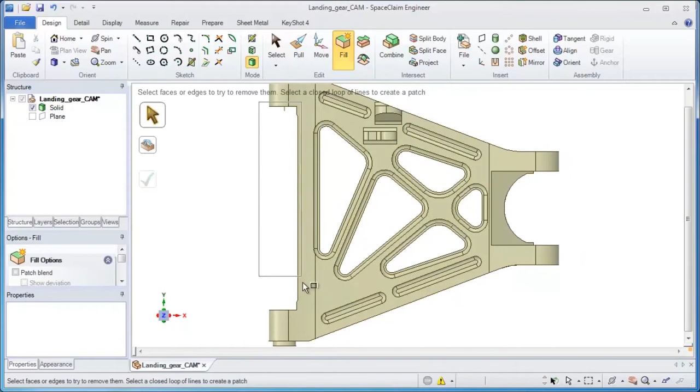Jig and fixture design is critical in almost every part that's machined or manufactured. And it's difficult because most of the time people are sent 3D models to work with and they need to prep them and get them ready to make their jigs and fixtures. But with SpaceClaim, changes can easily be made to downstream data, and this can come from IGES files, STEP, or really files from any of the major CAD systems that are out there.

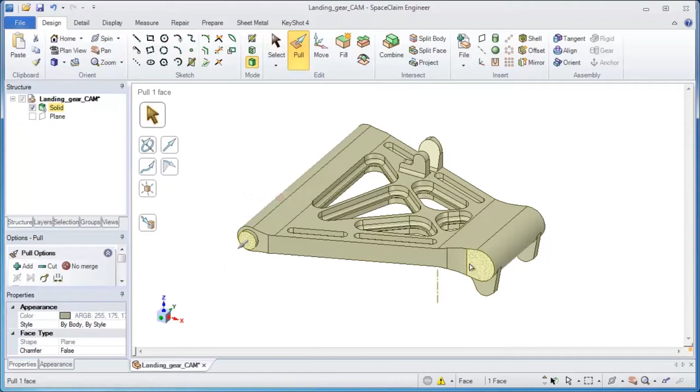You see, the fact is, most geometry needs to be tweaked, changed in some way before a fixture can be made. Pockets might have to be filled in, faces are modified, and stock needs to be added in certain areas. In SpaceClaim, when you're done editing the model, you can of course lock the model down, so no further changes are accidentally made to the design.

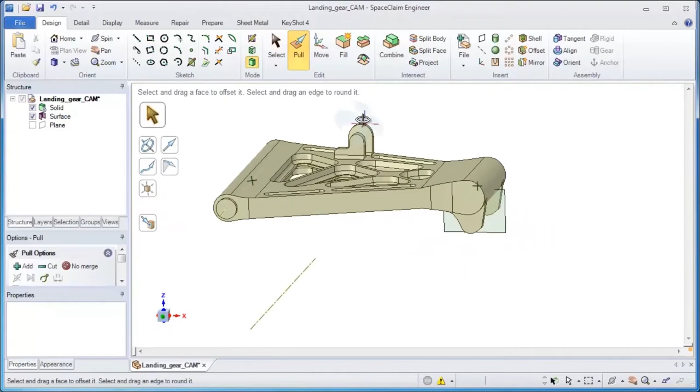SpaceClaim is a tool that can do two main things in this case. First, it's a tool that can modify any incoming geometry, treating it as if you made it from scratch in SpaceClaim. The second thing it does great is it makes models from scratch, so you can make your own geometry, maybe to make soft jaws or models to hold your parts as you're doing your fixture and jig creation.

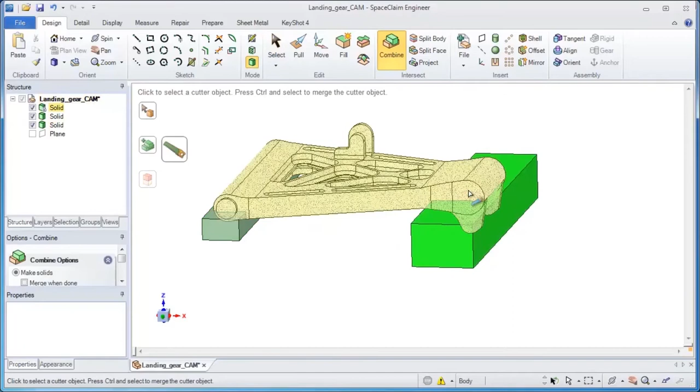So we've made two simple blocks, and it's as simple as subtracting the workpiece from them to get the inverse. Now we have the soft jaws just to hold the model, and the best part about this is that you're not tied to the model in any way. If you need to add bolt holes, if you need to change faces, even if you want to stretch these out and cut them away so it's easier to manufacture, you can do so. Or why not offset all of the faces so you can machine at the nominal tolerance?

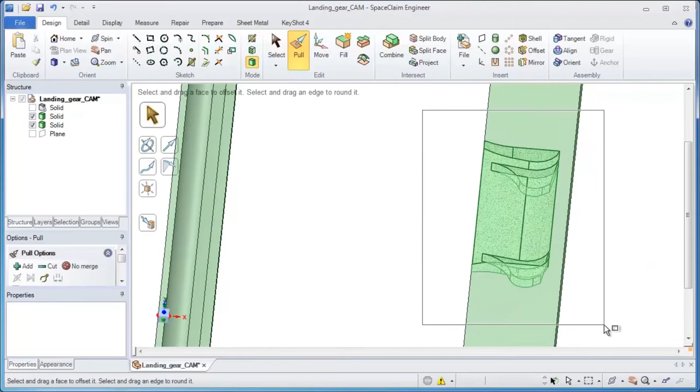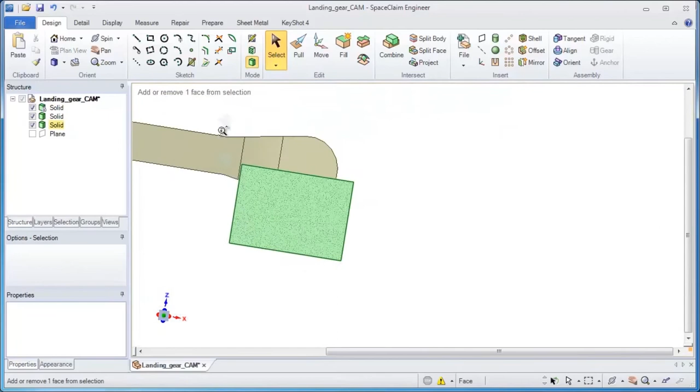Now with SpaceClaim, it's essentially one tool, Pull, that does so many of your operations. It offsets, it creates geometry, so you can really get in, get out, and focus on getting your job done. The thing people realize after using SpaceClaim is that they're not paid to mess with geometry and make changes to it. They're paid to get their job done. And this is what SpaceClaim wants more than anything else.

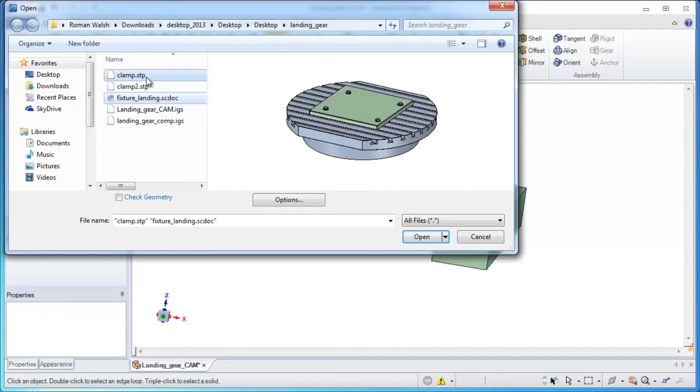We want you to be able to modify your models, make changes quickly without having to worry about where it originated. And in fact, if you want to import this part with other models, such as other STEP files or files from SolidWorks or any other CAD system, you can do just that. And this helps companies take full advantage of things like clash detection in their CAM tools.

So let SpaceClaim work with you and show you how we've been helping companies all over the world modify their parts and designs and create jigs and fixtures extremely quickly.